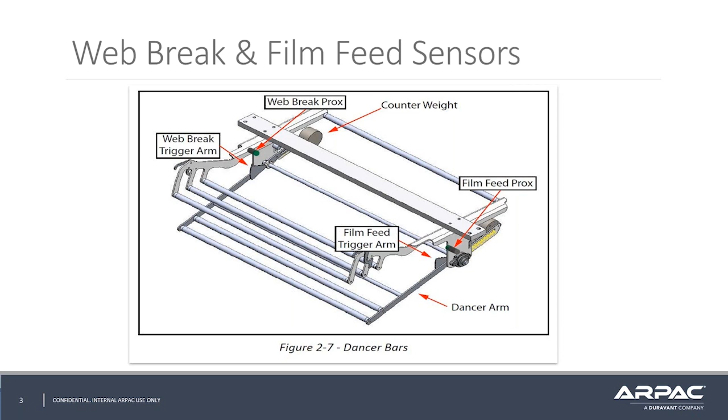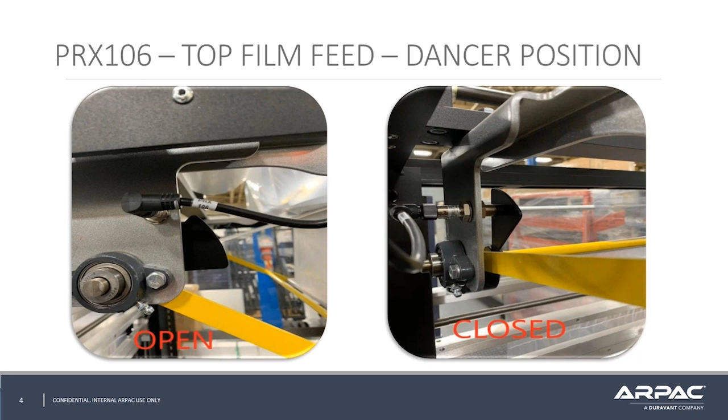The top film feed prox should be reading the trigger flag for the full stroke of the dancer bar, except while completely open or completely closed. The bottom film feed prox should read the same as the top film feed, reading the full stroke of the dancer except at the extremes of fully open or fully closed.

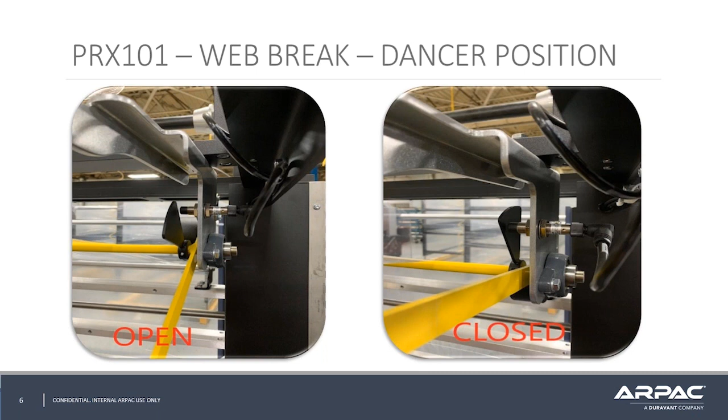The web break prox needs to be triggered the same way the film feed is triggered. The web break sensor should read the trigger flag for the full stroke. If the film breaks or gets jammed, the web break sensor should turn off and trigger the web break alarm.

To ensure the dancer bar and film feed will function correctly with your product, you will have to adjust the tension weight on each side of the dancer bar. Set the weight in the same location on both upper and lower dancer bars. To increase tension on the film, move the weight towards the center. To decrease tension, move the weight to the outside of the bar.

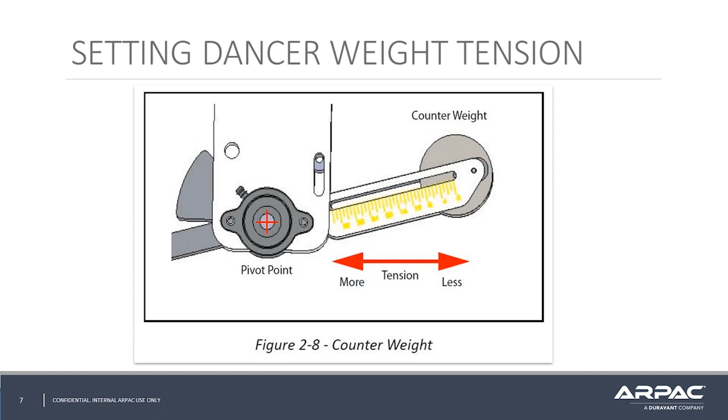All right, let's get into topic 2. Polyethylene seal knife inspection and cleaning.

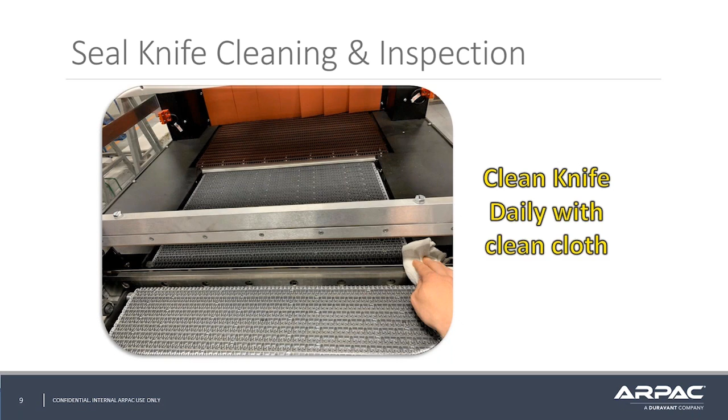Daily cleaning should be performed at least after every shift to ensure the knife holds its edge and the silicone does not wear off on the blade. Clean the knife with a clean cloth while the knife is still warm. Do not dig or scratch at the inserts.

In order to clean or replace the inserts in the knife, you will need to remove the seal bar from the frame. While the machine is powered down and locked out, remove the connector for the seal bar power. Then remove the 2 bolts that hold the seal bar to the frame. The seal bar unit should be removed. The machine can be configured with the seal bar mounted on the top or bottom of the frame.

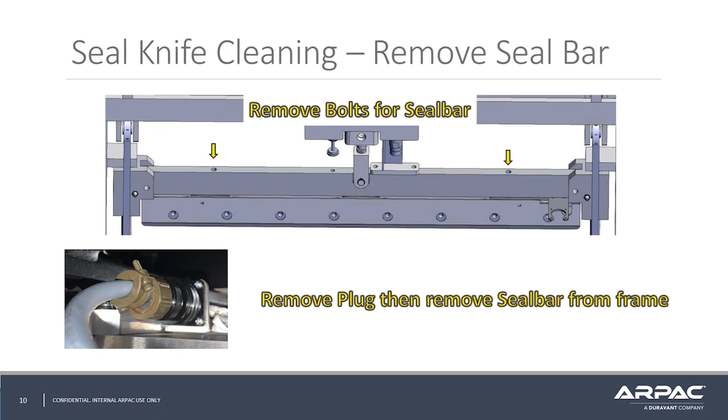Next, remove the outside covers of the seal knife to access the seal knife clamp bolts. Then remove the screws that hold the spacers for the outside covers along with the spacers and replace any damaged or burned spacers.

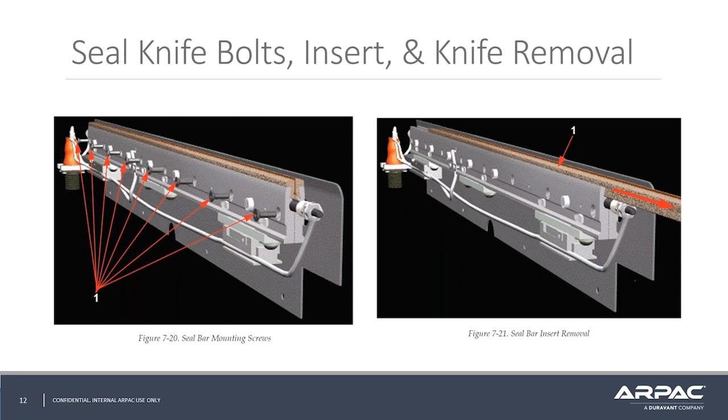Finally, remove the screws that hold the inserts and knife. Inspect the knife and inserts for any damage or warping. If the inserts have excessive damage or missing any Teflon coating, they should be replaced to ensure a good seal. Clean the knife and inserts with a clean cloth and some light acetone and reassemble the seal knife.

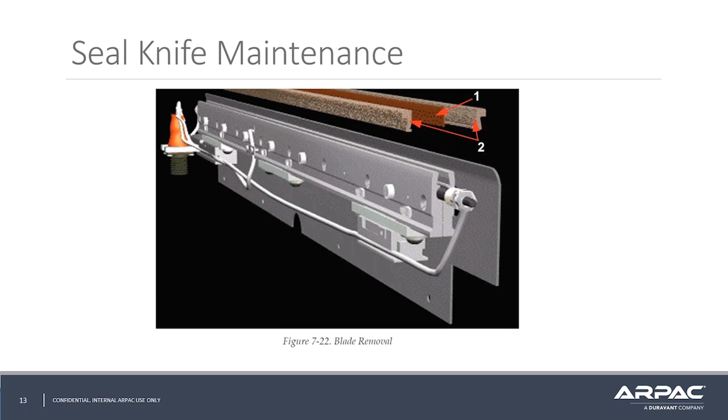Let's move on to the third topic, seal bar heater coil troubleshooting. There are times when the seal bar will not heat up, which will not allow you to run. There are several components to the seal bar heater coil that will need to be checked systematically to determine the root cause. These checks would involve a multimeter and control cabinet access.

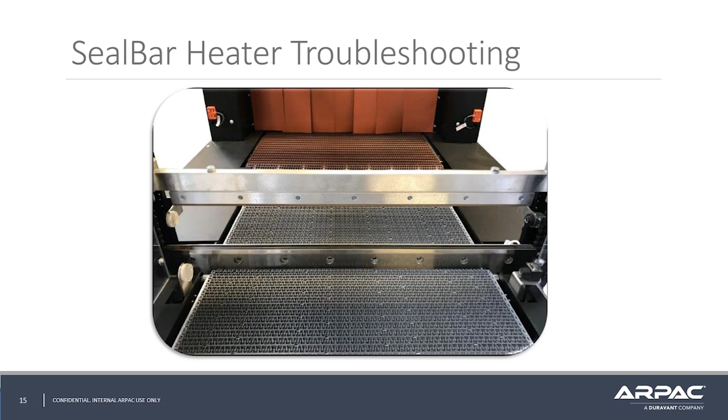Follow lockout tagout when necessary. The temperature controller receives feedback from the thermocouple and activates or outputs power to the heater coil when needed. The set point arrows of the controller can be set to the desired temp and the controller will be showing out when it is functioning or attempting to activate the coil.

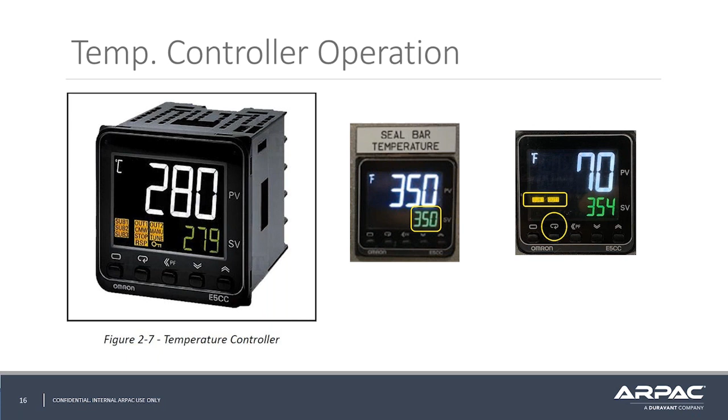If the controller is not outputting, press the menu button. On the next page, the controller should show run. If there's a fault instead of run, then there may be a problem with the unit and may need to resort to the manual for instructions or determine if there are problems with the controller wiring.

Next step would be to check the controller circuit. Check to make sure 358 circuit breaker is not tripped. If it is, you need to check the circuit to find out why it is tripped.

If there's no output on the controller, you can check the thermocouple with the meter for an open circuit. If it is open, then the thermocouple may be faulty.

When the controller is outputting, check AC voltage on wire 359, which should be present. If you are outputting and you have voltage on 359, turn the power off and check the heater coil for a short or open circuit across wire 359 and 2. If there's a dead short or open circuit, the heater coil may be faulty.

In addition to checking the circuit, you may need to check the integrity of the wire harness for the heater coil and the wire terminal on the heater coil itself. Make sure there is no damage or loose connections on the connector or on the heater coil. These steps will hopefully get you in the right direction of solving the problem of no heat with the seal bar.